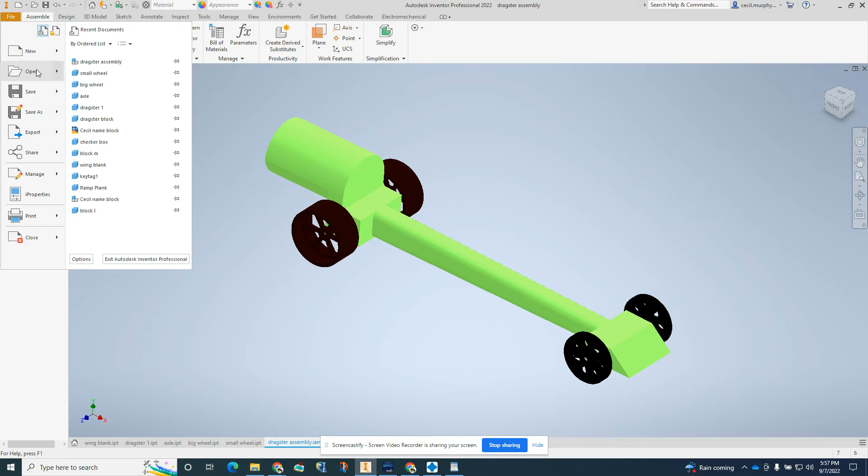Okay, now we're going to make a drawing for our dragster. So we're going to click on File, New. We've done a parts, we've done assembly. Now we're going to go to a drawing.

Now we're going to click on this first one. It says ANSI millimeters. Double click.

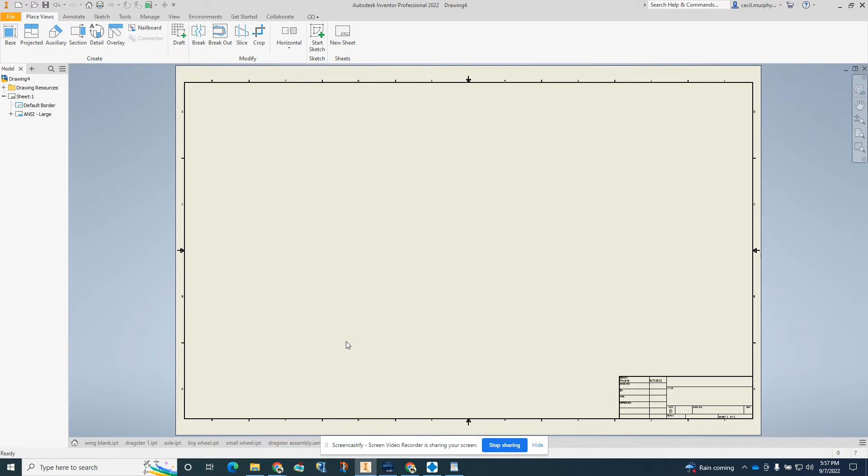Now I already have the dragster assembly open, so when I select base, it's automatically going to put the dragster here. So if we select base, and if it's not there, you can always come up here and find your file and select it from there as well.

Remember if we go straight up, we want to see that's the front side view, and then go up here and see the top view. If we go straight to the right and click again, we'll see we're turning it to the right.

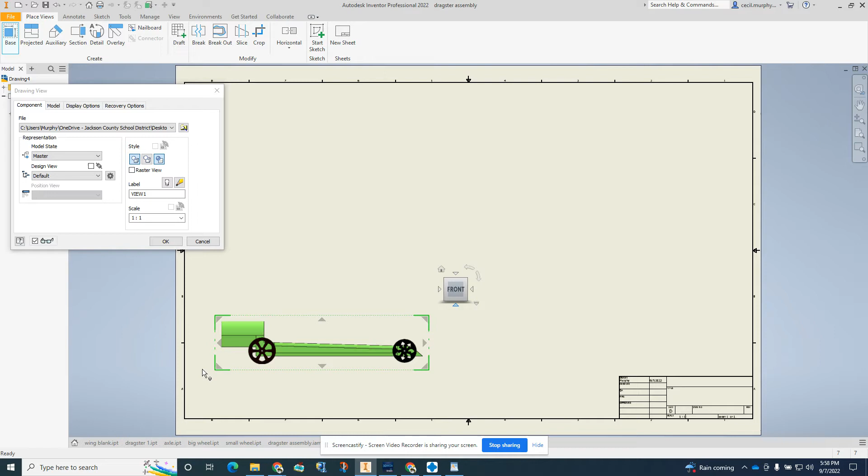It'd be a good time to show you, if I click on base and it's not turned the way I want it to be turned, you could flip it. But this first picture should always be the one that tells the most about it.

So click straight above again, straight to the right, and diagonally will give us an isometric view where we can see the top, front, and right all at one picture.

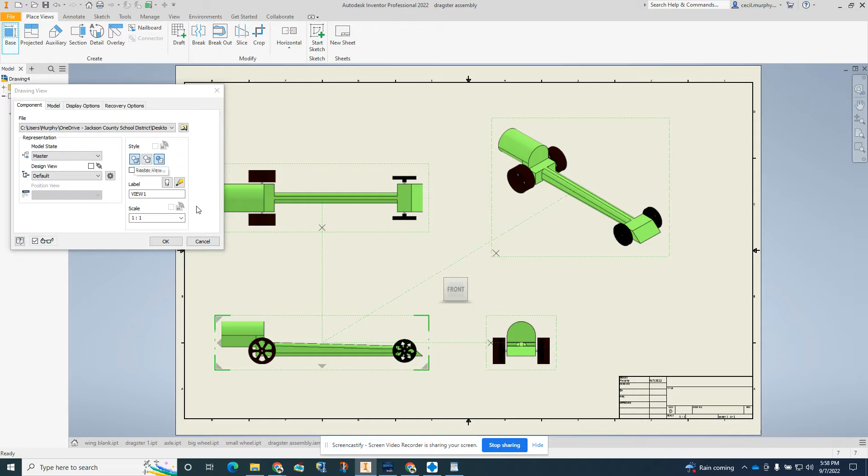If you want the color to stay, you will select the shaded button. If you want to see the hidden lines, which I'll show you what that means - that's these dotted lines here, it shows you where there's a hole there - I would like that to be shown.

Now let's go in dimension. So we're going to select annotate, dimension, and you want to put all the dimensions that someone else would need to build this. So I'm going to select on the back of the car and the front and drag it down. And this is in millimeters, so we can just leave that number there, or we can type mm here for millimeters.

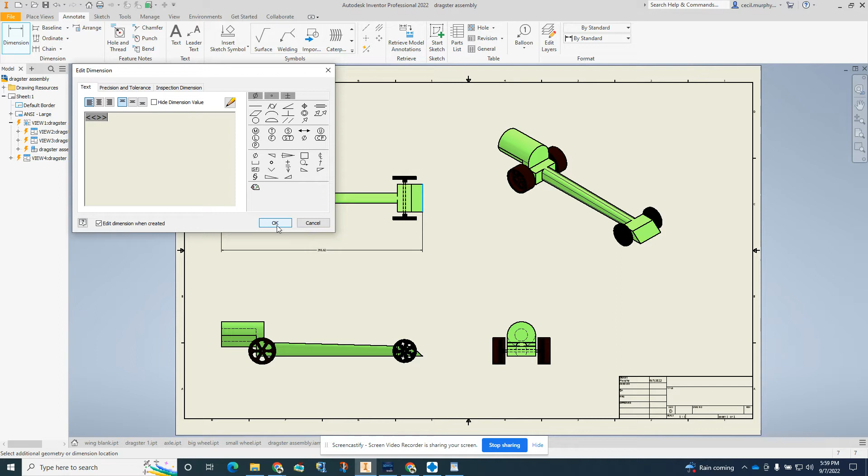I'm going to leave it like that, and you can add a sentence later on the piece of paper that says all units are in millimeters.

Now, this is really small. If we want to enlarge this print, we select, go to Manage, Styles Editor. It takes a little while for that one to open, and it may be showing up on your screen like this one.

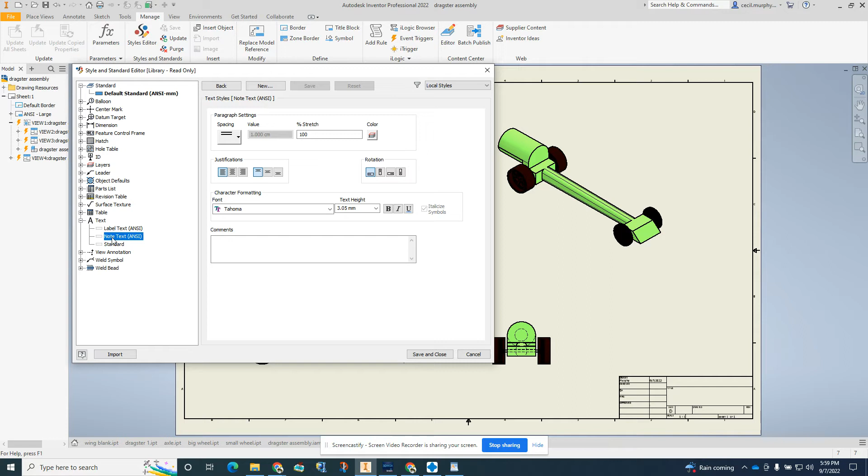Expand the text, select the note text, and let's change this to about 10 millimeters, and then save and close. Now you can see it's much easier to read now.

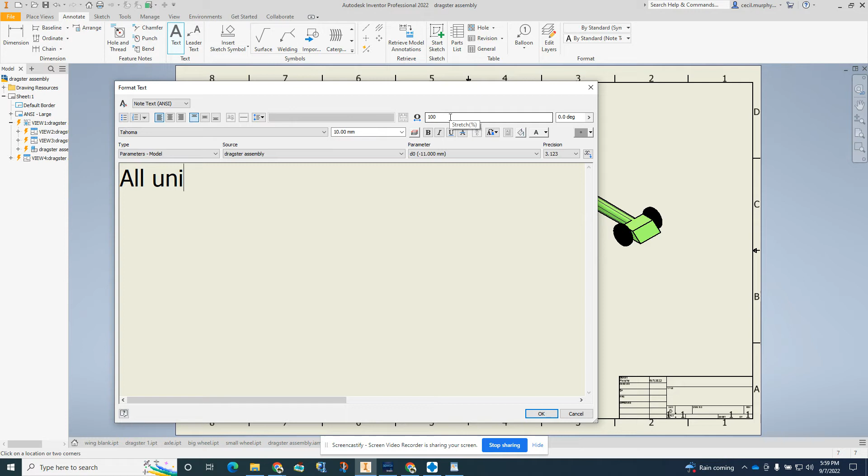Let's go back to annotate, and let's add us a note here at the top. And let's say all units are in millimeters. And that lets the person who's reading this know what unit you're dealing with.

So let's go ahead and add some more dimensions. How wide is this front end, for instance? And you want to put a lot of these dimensions to tell enough about your car.

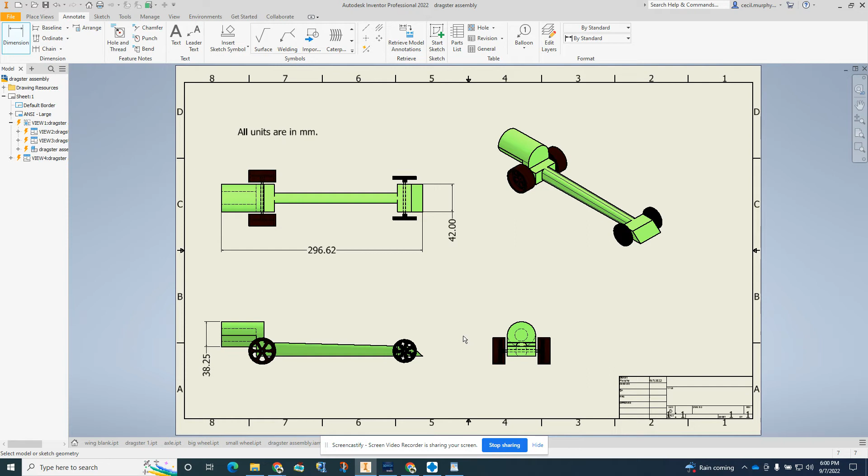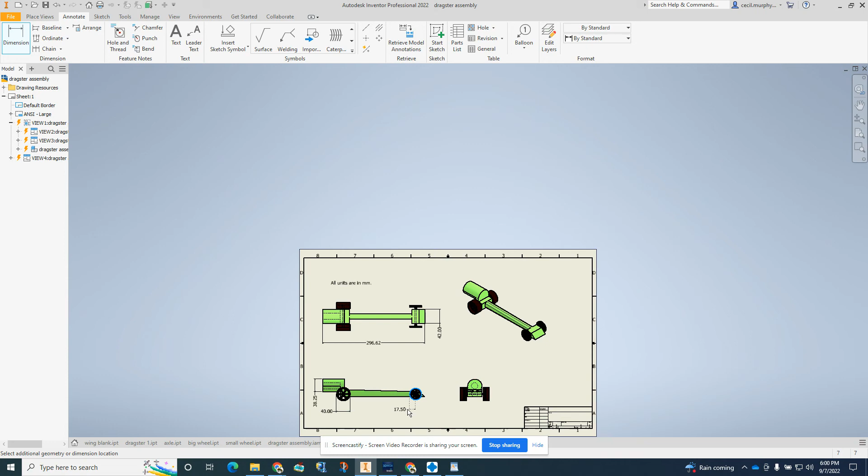How big are these wheels? How big is this wheel? You can always zoom in. Maybe I got it - that gave me the radius. That's okay, it'll be good to see that. But it did pop up as a diameter.

One thing you could do if you need to move this over, you could press the wheel in, hold it in, and you can drag your drawing around.

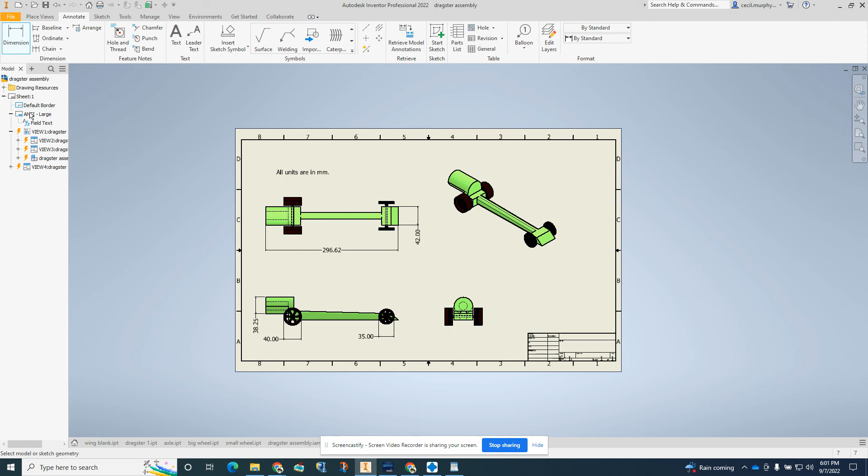Let's add some notes down here at the bottom. If you want to change anything in this screen down here in the bottom, it's ANSI large. You can click on the field text. It's not working, I'm not sure.

I'll add that later. Right now I want you to just add a text tool here. Click on it. First and last name. Your first and last name. And I want you to put the period also.

Click OK. And don't forget to put enough dimensions in there to show what you need the person to build it.